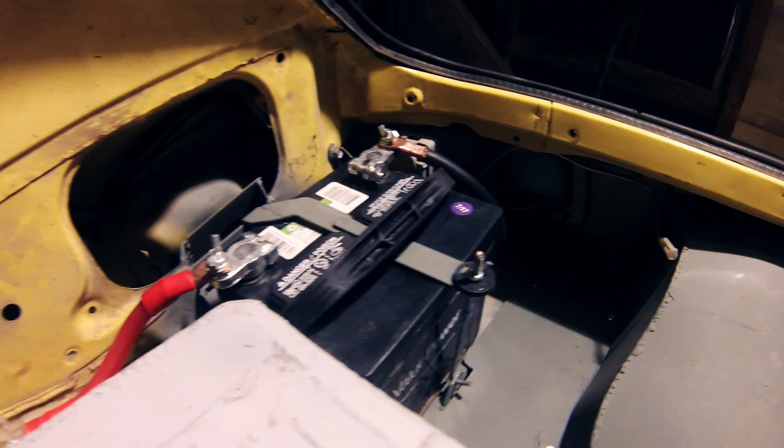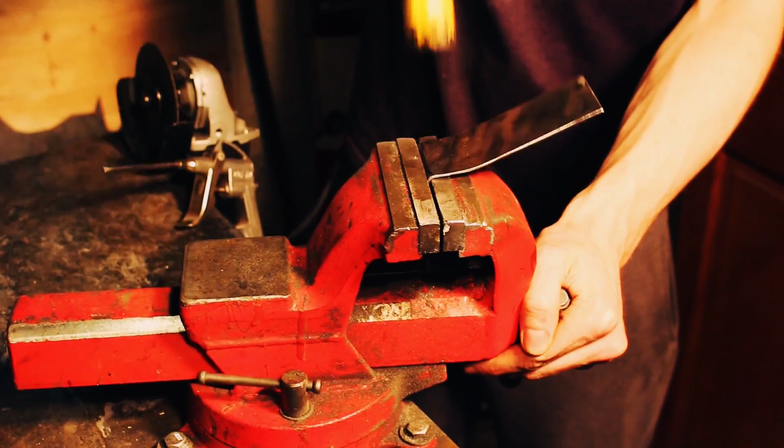I decided that I'm going to put my battery right here, but there's this portion here that's still left over from the fuel fill area, and I need to notch this area out, and then I'll put in a piece of metal here to kind of support everything.

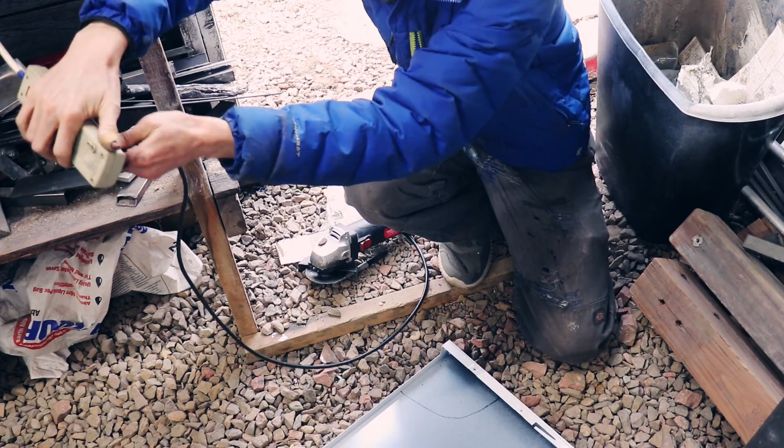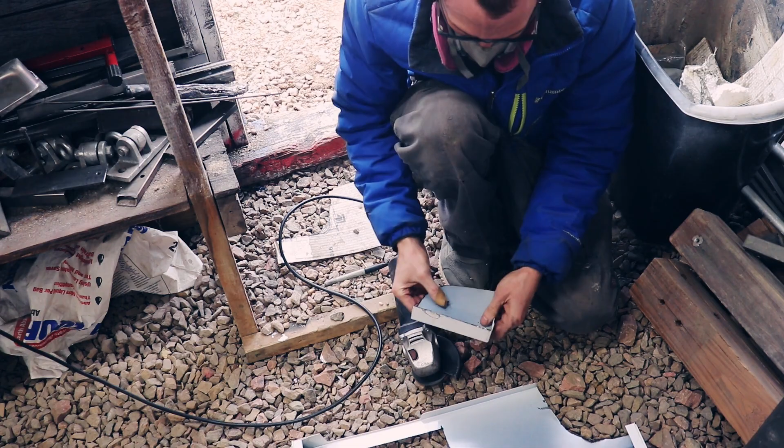Alright, so you can see that I've got everything kind of ground down, and I got my piece just set in there. It's kind of friction fit in there right now. I'm going to go ahead and weld that in.

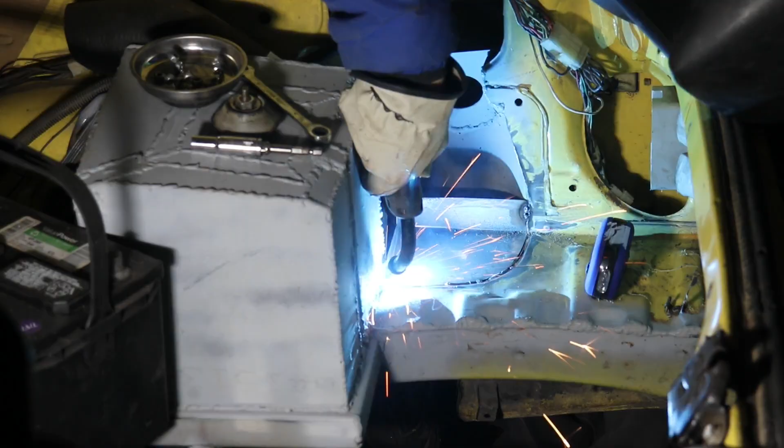Cut out some pieces of metal to fill in the gaps in the metalwork and add some structure to the battery tray area.

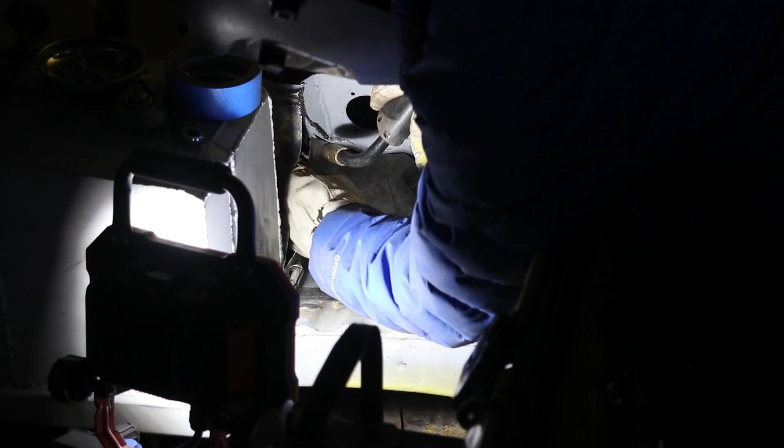Alright, so it's not perfect by a long shot, but that gives you a little look at just sealing it off, which is all I really wanted to do with this. But clean it up and then we can move on to the next step.

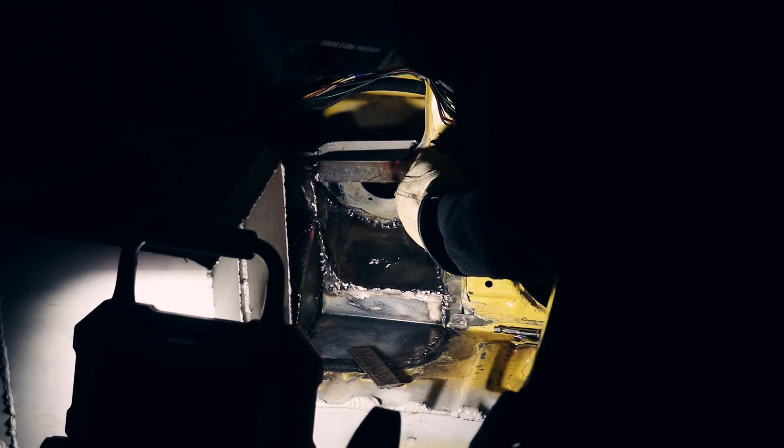After I put in the patch panels, I welded in a piece of 1 inch by 1/8 inch flat bar, which is going to act as a mount for my battery hold down.

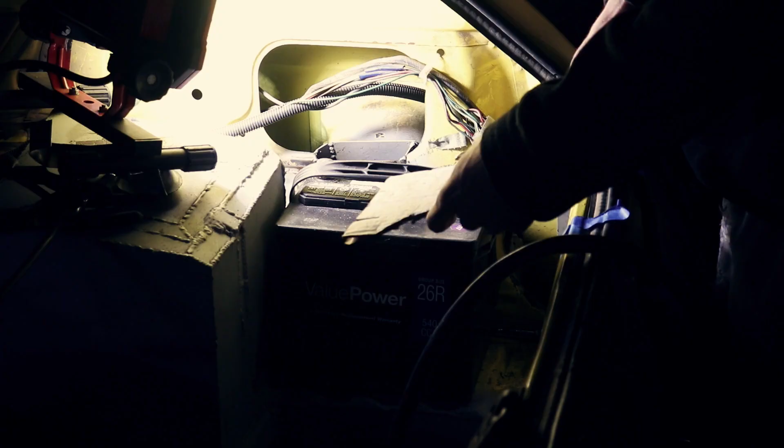I cut out a cardboard template to act as a guide for my hold down.

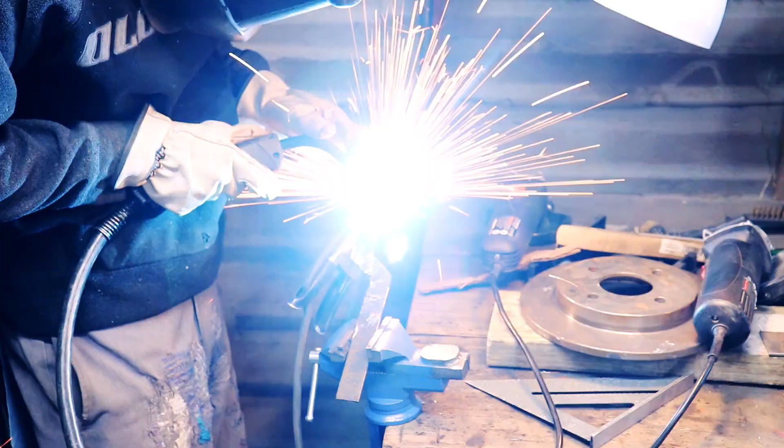When I was making a copy of my cardboard cutout in metal, there's one thin section in the middle that had to clear the covers for the battery, and I made sure to double that section up, so even though it was thinner one way, it was thicker the other way to compensate for strength.

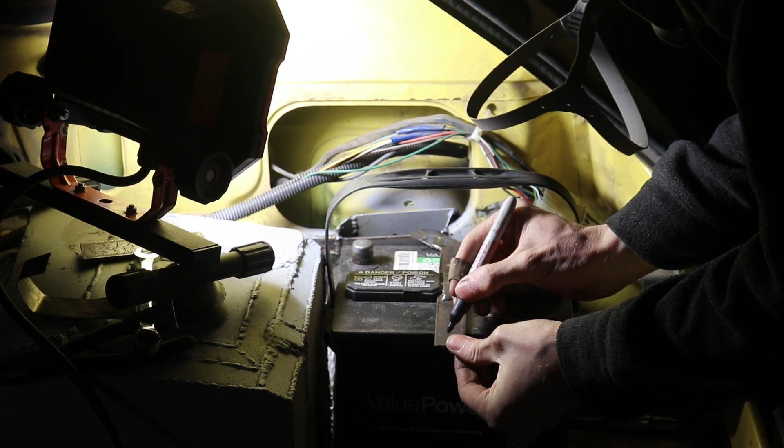So this looks pretty good. I'm going to mark this guy out where I want to drill my hole. Round him off a bit. Take this guy out.

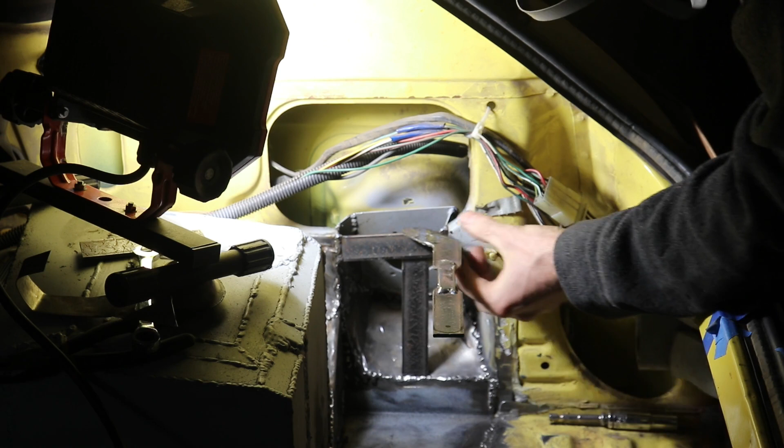Actually, it's kind of hitting the bottom here, so I'm just going to use a piece of flat bar to mark where I need to curl this around. So use this piece as a guide for my curl around portion and drill this hole in reference to this tie down. Do that.

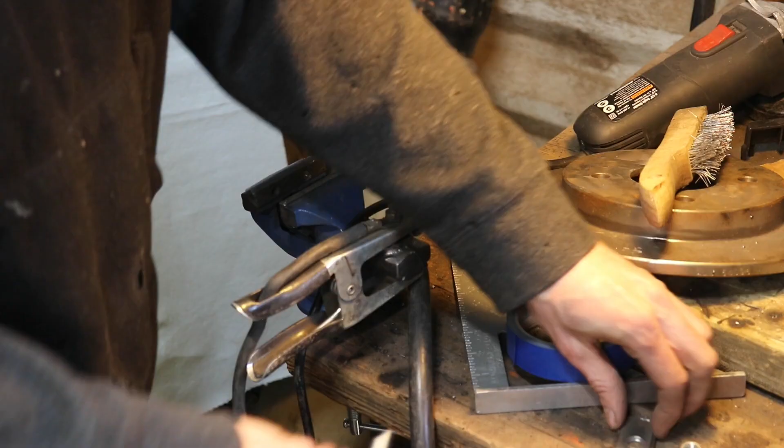Now that my hold down piece was made, I used a small section of flat bar with a hole drilled in it to make my main chassis ground.

I put some tape on the threads to make sure no welding spatter would ruin the threads.

Alright, so you can kind of see how everything's set up. Just put this battery in here for now. Oh yeah.

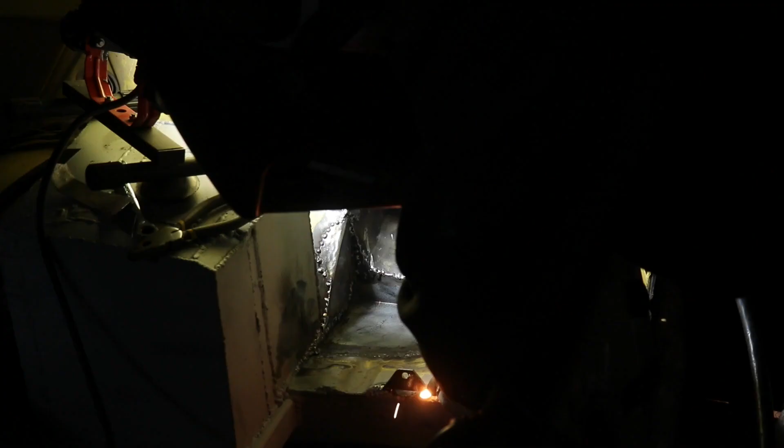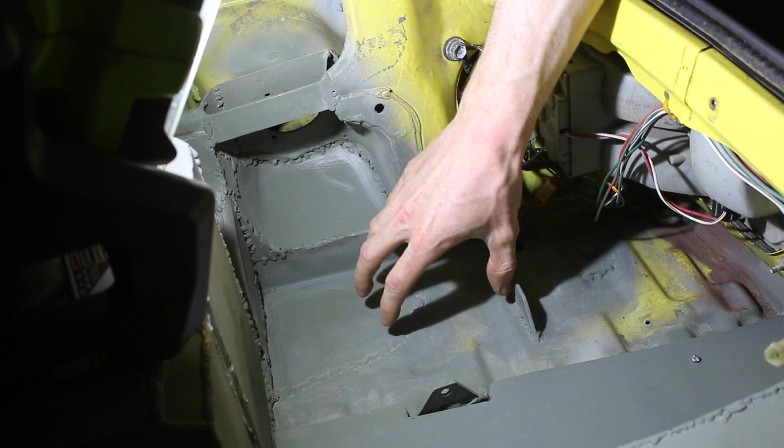Alright, so I realized I didn't have very good footage of basically this hold down right here and this hold down right here that hold the battery in place. So basically it's held down left to right, front to back, and also wanted to kind of show how this guy works a little bit. It's like a little hook shape. It just hooks on there, and then you can screw it down.

And then the way that I welded down the chassis ground is we had that little flat piece of bar I drilled a hole into. I drilled a hole in the floor here that was big enough for that nut to go through, and then I just welded all the way around it. It's kind of hard to see because there's primer on everything right now, but just wanted to give it a general layout.

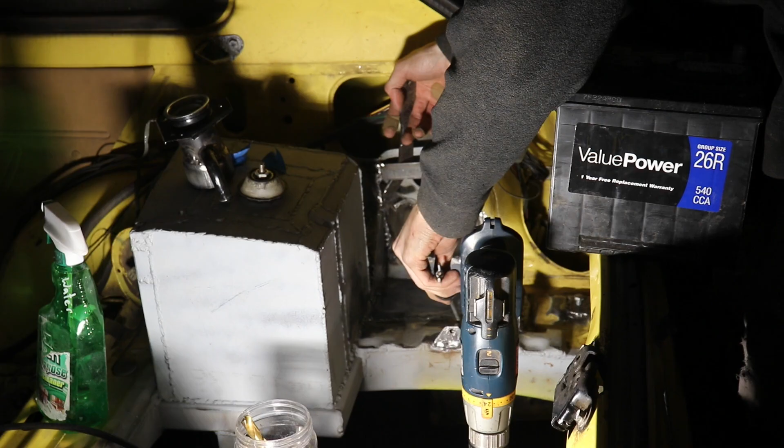It goes right there.

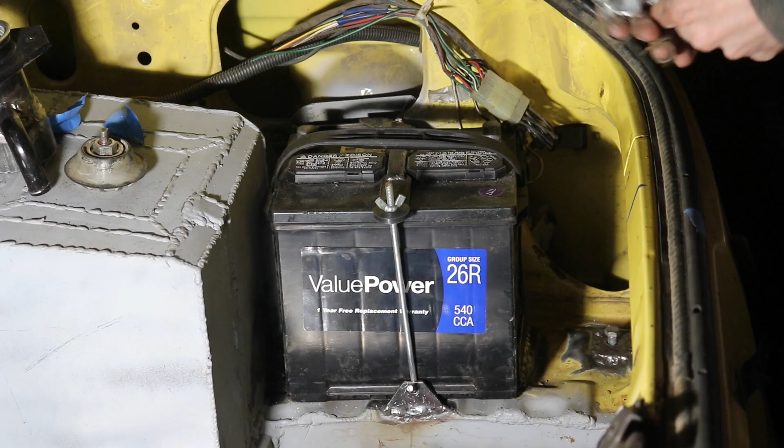Rockin', dude. So I got these terminals that screw on here, so this will be my negative.

And I gotta crimp these cable lugs because I got 0-1 gauge wire. And I'm gonna kind of loop this one around right here for our ground. That's why I put this guy right here.

I do have to figure out how to crimp these guys though. I think I just stick the wire in there and I need to have something to hammer on it with the right shape. So I'm gonna figure out what that is right now and whip something up.

Okay, so I have this 0 gauge wire here, and you can see I got this one end crimped. Feels like a pretty solid crimp. I don't have the proper tool. I'll show you how I did it. But for now, I'm just gonna mark where I want to cut it.

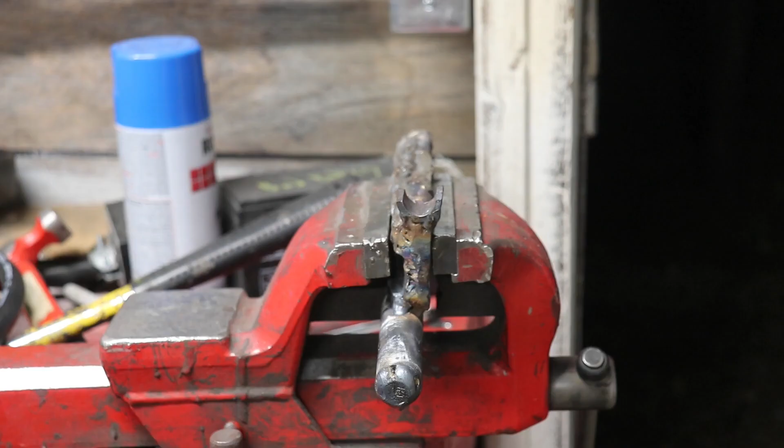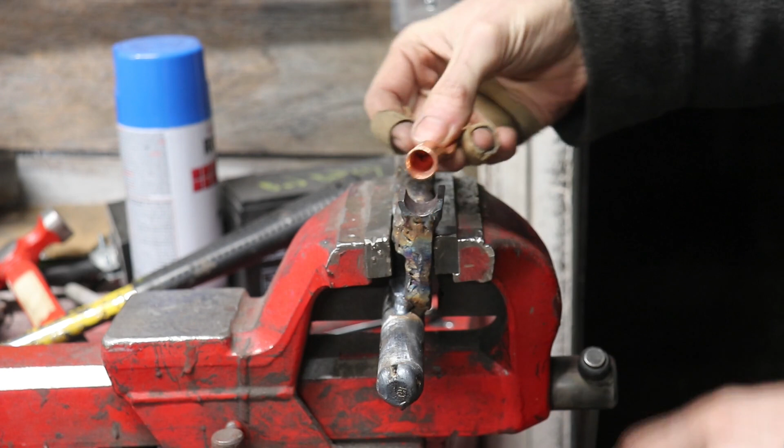Alright, so here's what I'm using. You can see I welded on, I have this weird thing that has a round part to hammer on. I use this kind of as a dolly type situation. But it's a half round that fits this shape pretty nicely. So I don't know if you could do it either way, probably. Since I'm going to be having this face up, I'm going to try it that way this time.

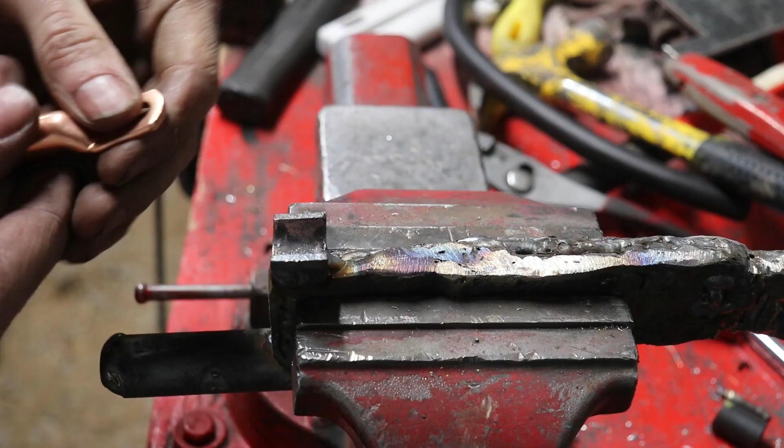Yeah, so if you're pretty careful, I don't think I cut any insulation. So I just set it there, and then just hammer it down. See, I'm pulling my weight on it, so I think it's pretty well in there.

So here's our ground wire. Connect it to our threaded ground connection right here. It's welded to the car. It's a unibody, so everything should be connected metal on metal in this guy. I think that should work fine. I'm not going to screw it together, but you can kind of see, I guess I can just for aesthetic reasons. That's how it will look.

Alright, so the next thing on my list is to mount the fuse. When you run a battery to the back of your rig, you've got to have a fuse because you don't want to have a fire inside your cabin. So this is where I think I want to put it. This is my holder, a 200 amp fuse, which is what came with the wire. I'm assuming I haven't done any math actually, which I probably should, but I don't think I'm gonna. A circuit breaker is also a really good option because if something happens, you can just reset it, whereas if this fails, you have to replace the fuse.

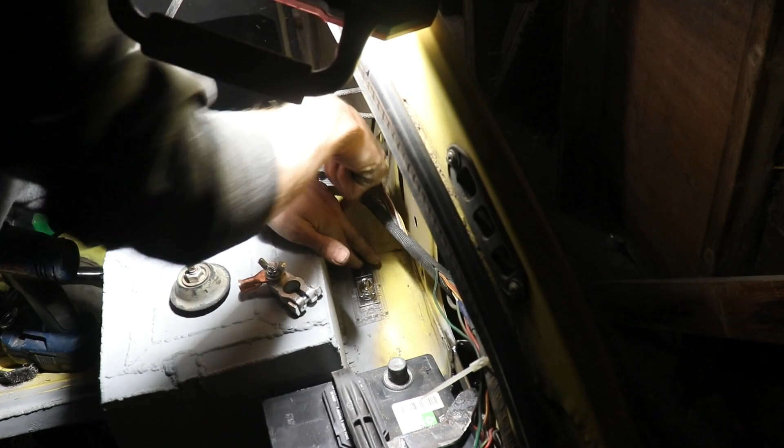For sheet metal like this, I usually use self-tappers, and then I come back with regular sheet metal screws.

Now I just have to, I got this negative disconnected because I don't want to accidentally cause some kind of issue here, but I'm basically going to mount that guy like that. You can see I already got one end on here. When I mocked up the cable path to the fuse, I noticed it was a pretty tight kink, so I decided to move the fuse mount a little bit further so it would be a more gradual bend.

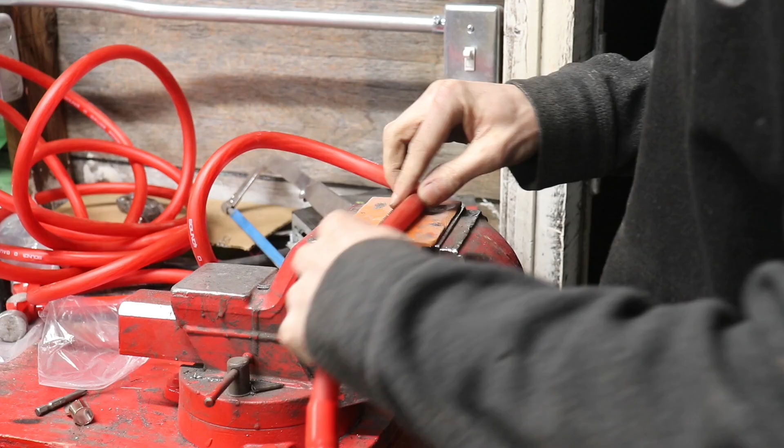This time I decided to get a rough placement for the fuse and crimp the cable ends before I screwed down the fuse, just so I didn't have any surprises when I hooked everything up. So I cut this length of cable. I used the hacksaw method rather than a safety razor, which worked out a lot better.

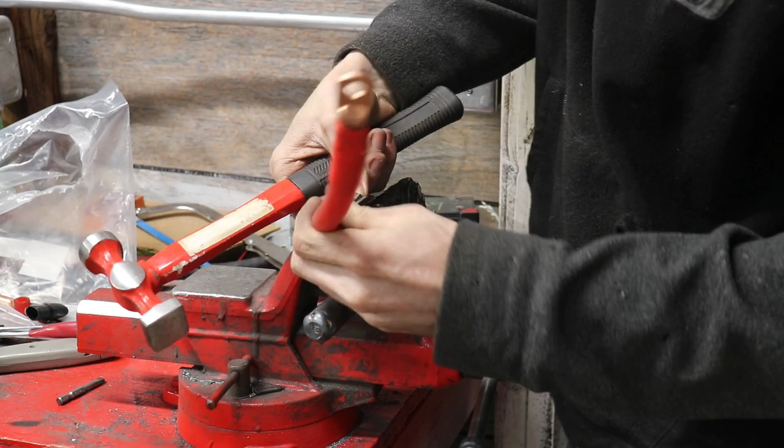Get this guy on there. Yeah, so it wasn't a hugely aggressive move, just a little bit over. I think I'm pretty good with that. That should be a pretty good spot. So it's a really tidy, almost perfectly straight situation. It's not like a big S or anything like that, which I like a lot.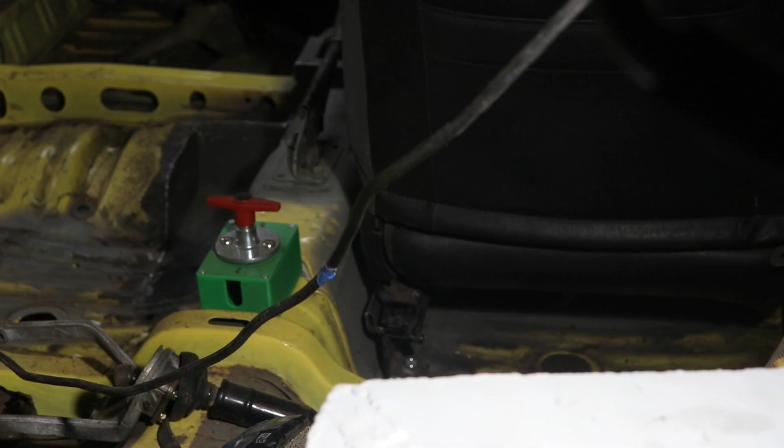Next, I need to continue the positive wire forward to the main battery cutoff, which is right behind my e-brake.

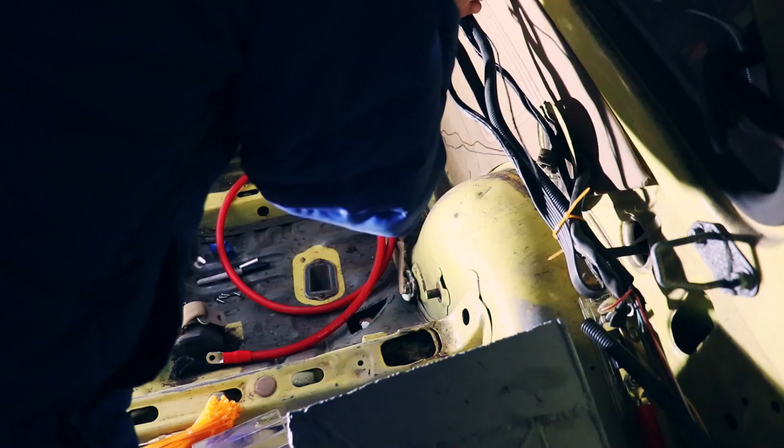Kind of envisioning where I'm gonna be. Make a line right there, and a line right there. Before I connected up my cable, I zip tied a lot of my wires out of the way so I had a clear path to my disconnect.

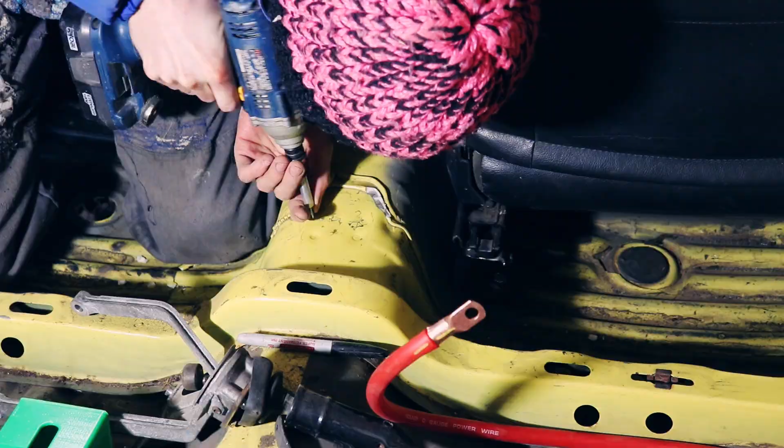Using this main disconnect wasn't 100% necessary. It's just a cheap Harbor Freight unit that I printed an insulated box for, but it's just an added safety feature in case anything happens. I can shut power to everything.

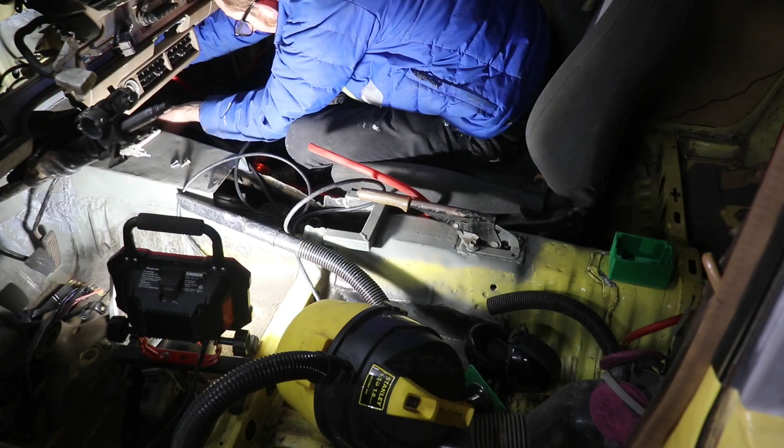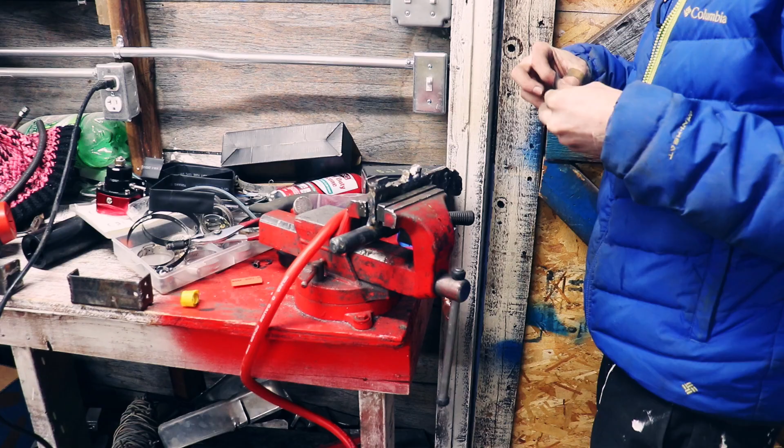I decided to run the main hot wire from the main cutoff to the passenger side of the tunnel and up through that side of the firewall as well. It's important to make sure to heat shrink any exposed copper on this hot wire. Even though there's a main fuse in place, you really don't want to end up having to use that, so use all the protection you can with the hot wire.

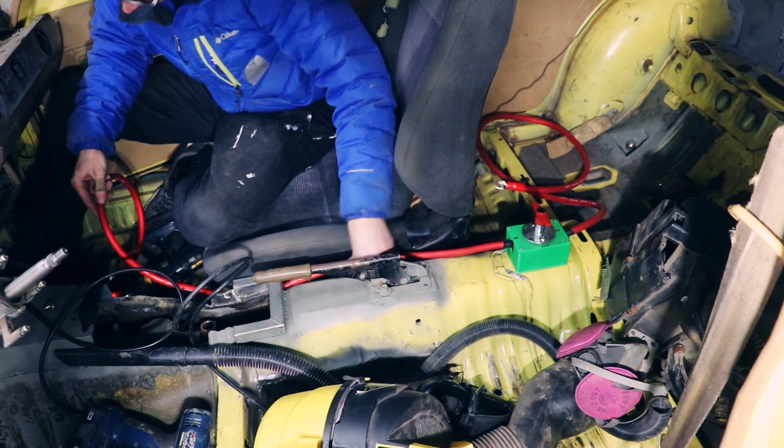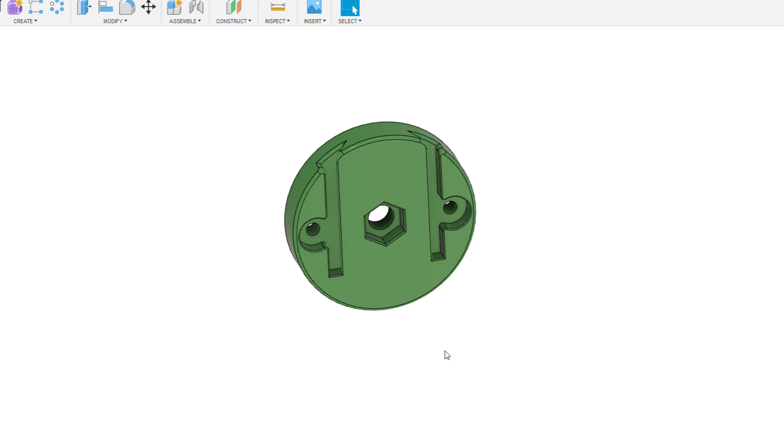So now that we made it to the front of the car with our power wire, let's talk about this bulkhead connector, whose job is to pass the power wire through the firewall without arcing out on the body. I actually went through a few different designs on this, but this is the one I stuck with. So to start out, you need to make a hole. This is an ABS piece. It's actually two pieces. I have one piece invisible right here.

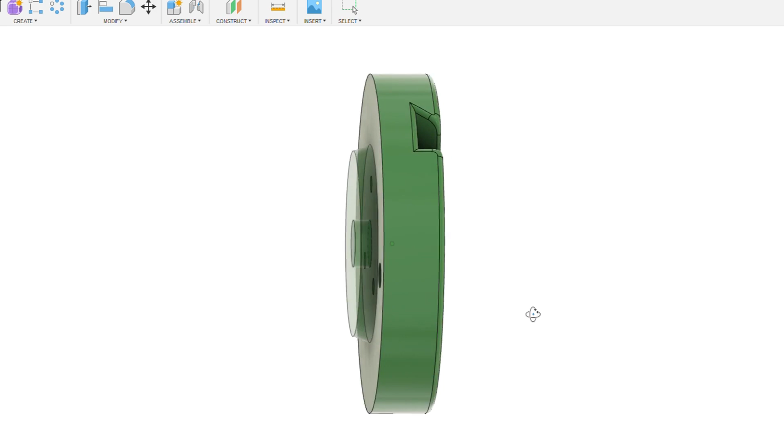You can kind of see there's a little bit of translucency to that part I added there, but there's basically three pegs that connect these two pieces with a press fit. I added a little glue just for safety, but you need to make a hole that this can slide into, and that hole would be in your firewall.

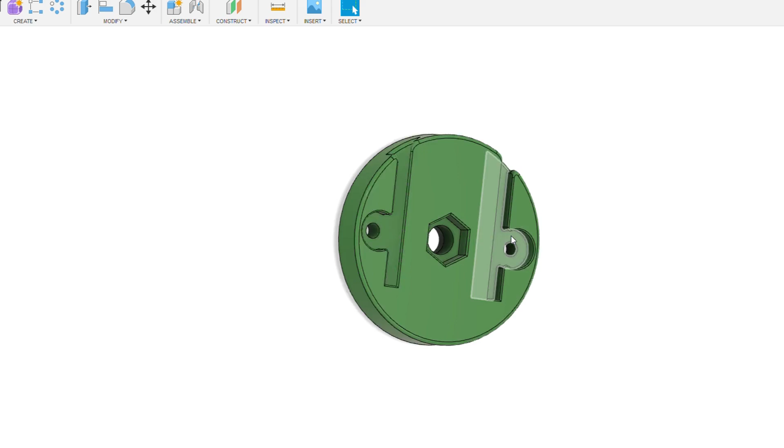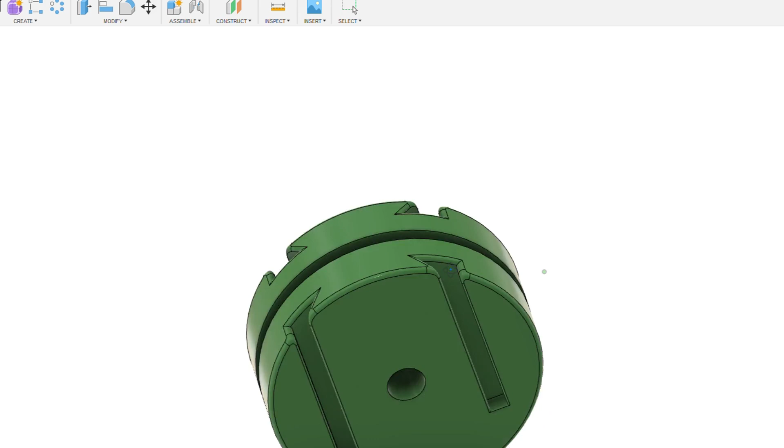You also need to slide a 5/16 nut into this slot right here, which is a friction fit, and then go on to the other side, which in my case was the engine bay, and add this piece here. There's two holes in this, and you can see the self-tappers fit into that area, so that locates it. And then obviously there's the nut on the backside.

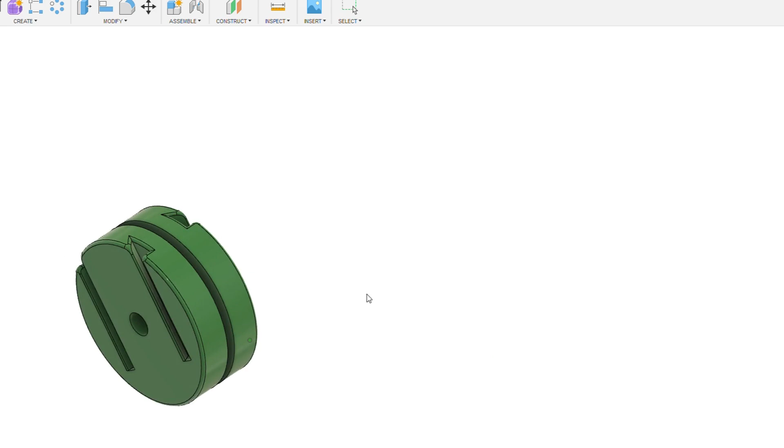You can put your lugs here, and once you get that screwed on, that bolt will be sticking out here. You can add another nut on top of the first one to clamp down your other side. And then for safety, you can see these big slots that run down it, and this is a cover I printed that slides into those grooves and covers your lugs.

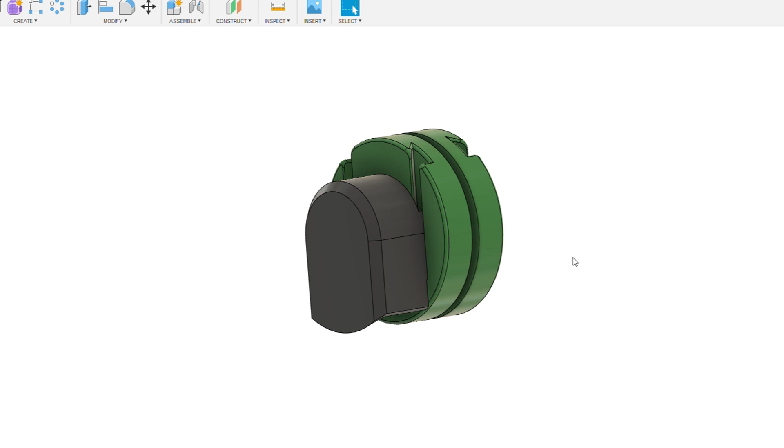So that's pretty much the design. You can buy versions of these. I've never seen anything quite like this, but there's other stuff available to use. I just wanted to use this as an interesting project, so that's what I'm using. But if you don't have a printer, just Google bulkhead cable lug connector, and you'll find a bunch of different stuff you can use. Alright, so there's a good look at the pass-through.

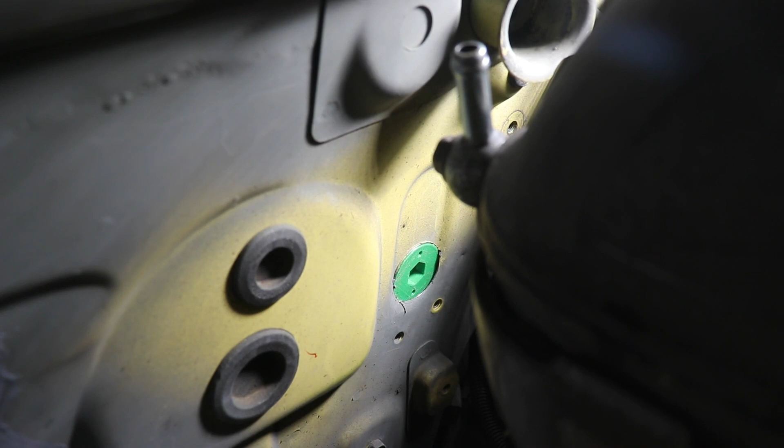Now I'm going to come in from the inside and do the sheet metal screws, so you'll see them poke out through there. This was actually a little bit different of an iteration of the bulkhead pass-through, but the same principle applies. Alright, so it just worked out just like I wanted it to. The camera shut off, but you can see I got two screws poking out.

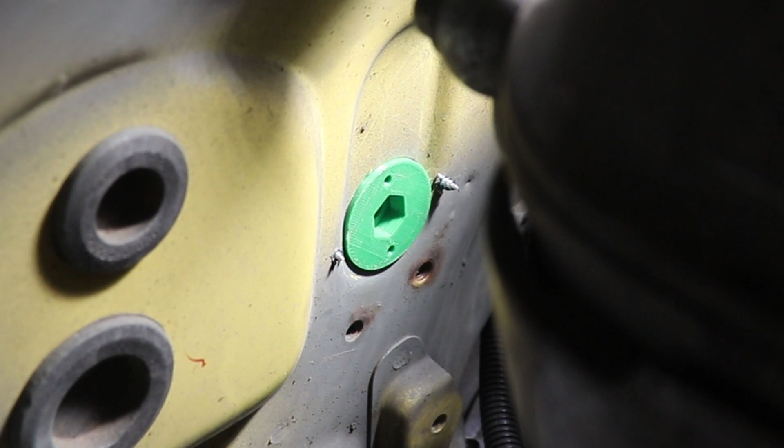Given that the pass-through is right behind the air intake, it's super hard to get a good shot of this, so I just used my phone for a couple shots. Here you can see the alternator and starter wires coming into the engine bay. Here you can see it with the cover on, and here you can see what the inside looks like with a little teaser showing some future wiring.

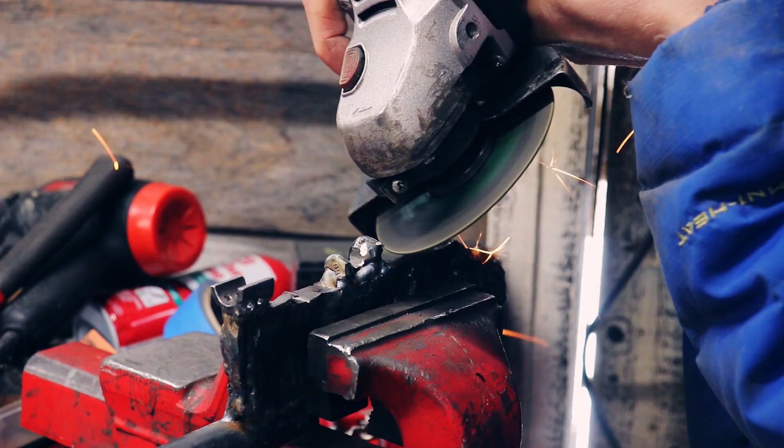For the starter and alternator wires, I used the same method of crimping on the cable lugs as before, but this time I had to make a new U-shaped crimp jig because I was using a smaller 2-gauge wire that was actually recycled from the original wiring harness.

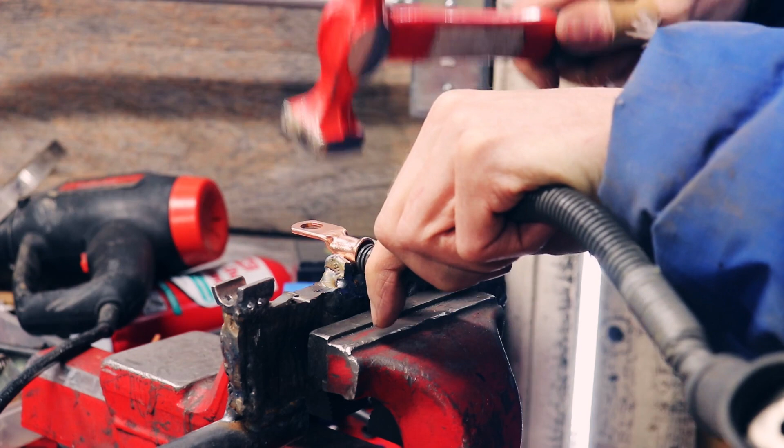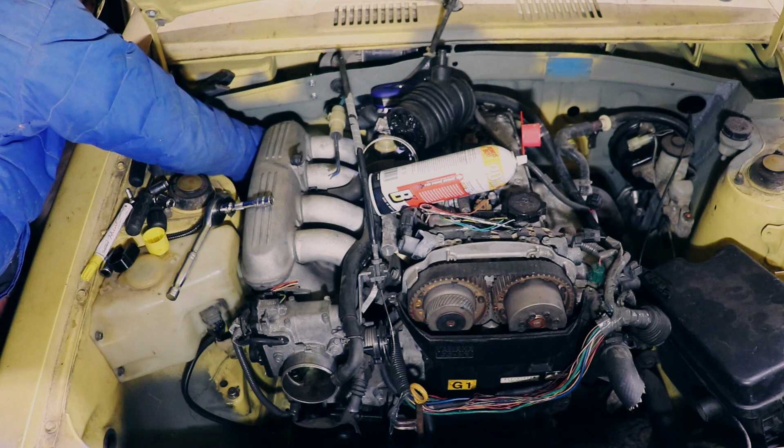The main starter lug can come directly from the positive battery terminal with only the main breaker in between the two. But for the alternator, it's preferable to use a 120 amp fuse or breaker, because that's what the Altezza originally came with. I'm going to put this in line with the alternator.

I 3D printed this little mount. I'm going to use a factory hole here, and I've got a little peg here that I'm going to drill another hole to locate this whole thing. So when this is set up like this, we have continuity between the two sides of the breaker. It'll break if the breaker is overloaded past 120 amps, and you can see that there's no continuity between there.

Normally I would have just screwed this right to the sheet metal, but in this case I just can't get a drill in there from the inside. So this is kind of an adapter I came up with to use a factory hole that was already in there, and just have to add that other hole which I can access from the wheel well. So I'm going to go drill that hole.

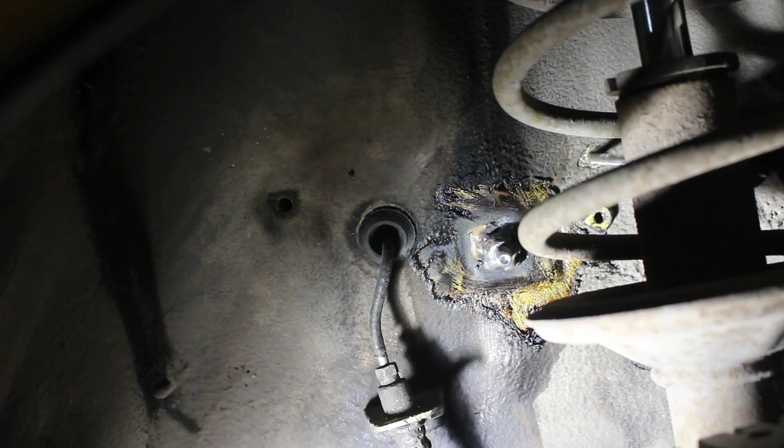Alright, I think that's a pretty good place to end the episode. I'm working on the next one right now, which is all about the fuel system, so if you're into that, it's coming. More things are rolling on this project. I'm working on some of the finishing touches now, which is a lot of the fun stuff, so I'm really excited to drive this car. Stay tuned.